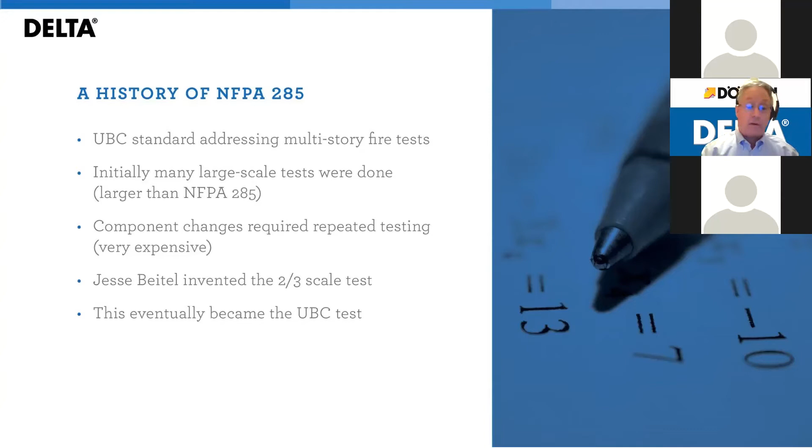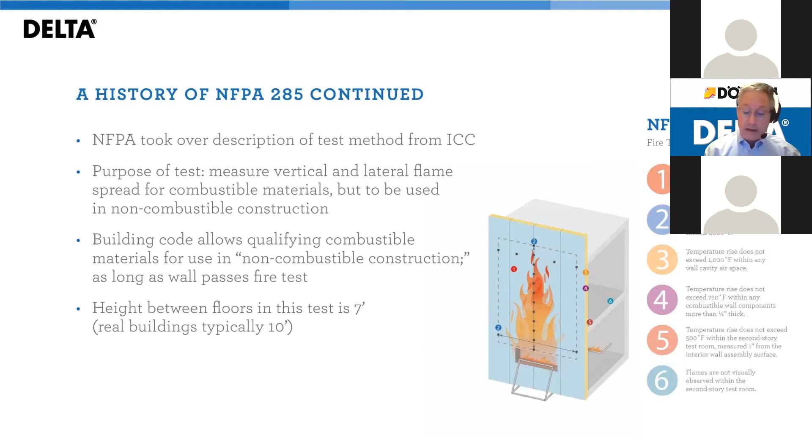To help address this complexity and expense, Jesse Beitel invented the 2/3 scale test. This eventually became the Uniform Building Code test, which, when the ICC came into play, was passed over to the National Fire Protection Association, the NFPA, to manage. The purpose of this test is to measure vertical and lateral flame spread for combustible materials to be used in non-combustible assemblies. So the building code allows you to use combustible materials in non-combustible or labeled non-combustible assemblies, so long as you pass this fire test. In the 2/3 test, the height between floors is 7 feet, whereas in a real building it's typically 10 feet. Hence, with some fast math, you can see that is, in fact, the 2/3 scale test.

So why does NFPA 285 exist? Quite simply, people use combustible materials in large-scale buildings, and they can catch fire and lead to some very tragic results. The 2/3 scale test was developed to help prevent uncontrolled flame spread in tall buildings, ultimately to reduce potential damage for people and property, to allow occupants time to get out of the building, and basically provide a much safer building.

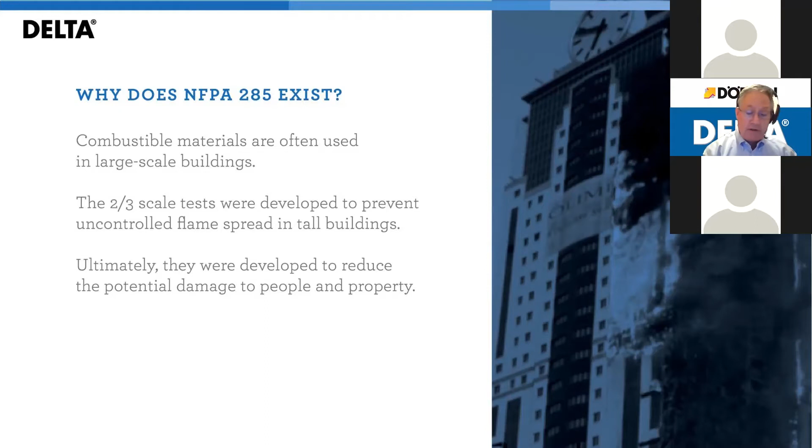But this is one of the major sources of confusion. What triggers the requirement for your building to be NFPA 285 compliant? In and of itself, building height is not a trigger.

It is actually considered a sub-trigger when considering WRBs in claddings. So the commonly held 40-foot rule really applied to whether or not you were using weather-resistive barriers. You can find other rules that apply to HPLs, high-pressure laminates, or ACMs, aluminum composite materials - 40-foot rules, 50-foot rules, and 75-foot rules. We're not dealing with those today. We're going to deal with it strictly with respect to weather-resistive barriers.

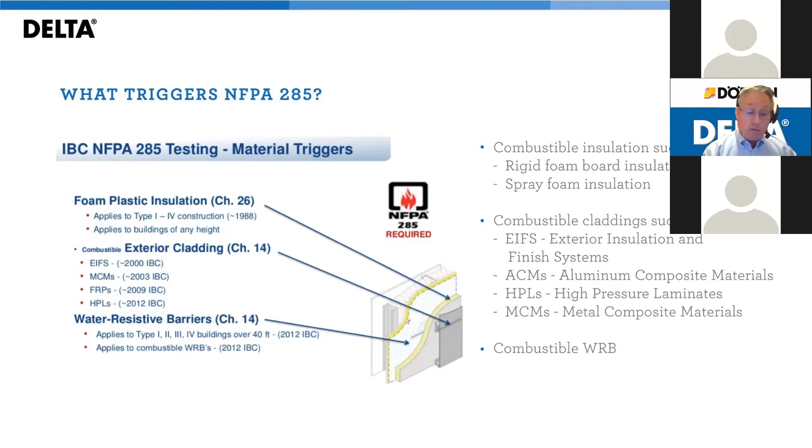One thing often overlooked is the fact that the instant you use a plastic foam in the wall for building type 1 to 4, at any height, NFPA compliance is triggered. Certainly in my personal experience, that's one of the most overlooked requirements.

So let's actually look at the pass-fail first. We will deal with the actual building code in a moment. These are the actual pass-fail criteria for NFPA 285. As a general statement, so long as the flames don't go higher than 10 feet, or not more than 5 feet to the left or right, you can pass.

There's also thermocouples in the system that will measure temperature at specific locations. A typical test may have 60 or 80 thermocouples. For example, number 11 would be outside the wall, 10 feet above the window. Number 28 may be 10 feet above the window inside the wall in the air gap. But as long as those thermocouples don't measure temperatures greater than 1,000 degrees Fahrenheit, you'll likely pass the test. However, always wait for the official lab report to ensure every thermocouple passed the test.

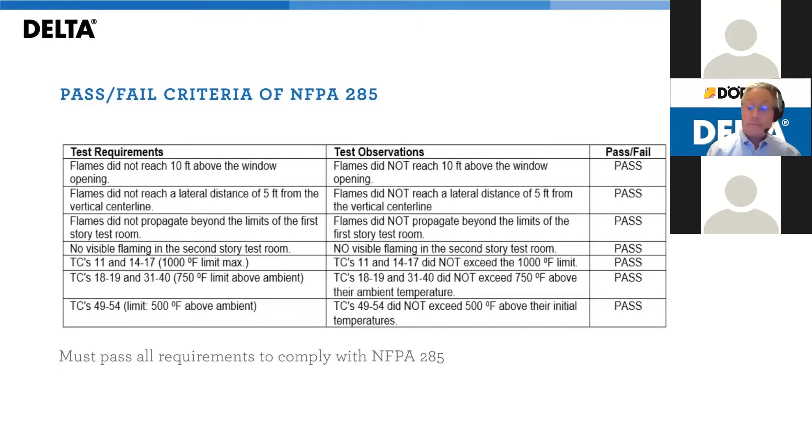So here's the basics of the building code. There was no requirement for NFPA 285 testing with respect to the inclusion of weather-resistive barriers in the system in the 2009 code. 2012 was the first attempt to limit WRBs and require NFPA 285 testing in buildings over 40 feet. Hence the commonly held understanding that 40 feet is the trigger for any NFPA 285 compliance - but it's only a sub-trigger with respect to the use of water-resistive barriers.

Most of us in the industry felt that that was a little restrictive. There's a wide variety of flammabilities in weather-resistive barriers - we'll touch on that again a little later. But in essence, that was fixed in the 2015 code.

So let's have a look at the actual code itself. Here's the section from the 2012 code - if you're keeping score, it's 1403.5 of the International Building Code. This is the part that basically said, in types 1 to 4 that are higher than 40 feet above grade plane and contain a combustible water resistive barrier, shall be tested in accordance with and comply with the acceptance criteria of NFPA 285. Well, since all water resistive barriers are flammable to one degree or another, that suddenly meant that you had to test all wall systems. And that's why the industry claimed that it was too restrictive.

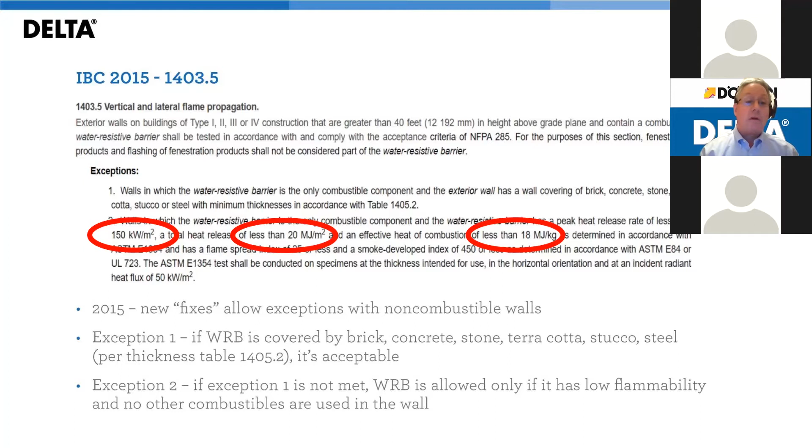This was changed in 2015, where in essence it said: if the WRB is covered by brick, concrete, stone, terracotta, stucco, or steel per some specific thicknesses, it's acceptable. But also, if exception 1 is not met, the WRB is allowed only if it has low flammability and no other combustible components are used in the wall. In those red circles, you can see some of the very specific measurements for the water resistive barrier. It must have a peak heat release of less than 150 kilowatts per meter squared, total heat release of less than 20 megajoules per meter squared, and an effective heat of combustion less than 18 megajoules per kilogram, in accordance with ASTM E1354.

2018 has exactly the same language. There was no change in the 2018 language, and there's also no change to the 2021 IBC language.

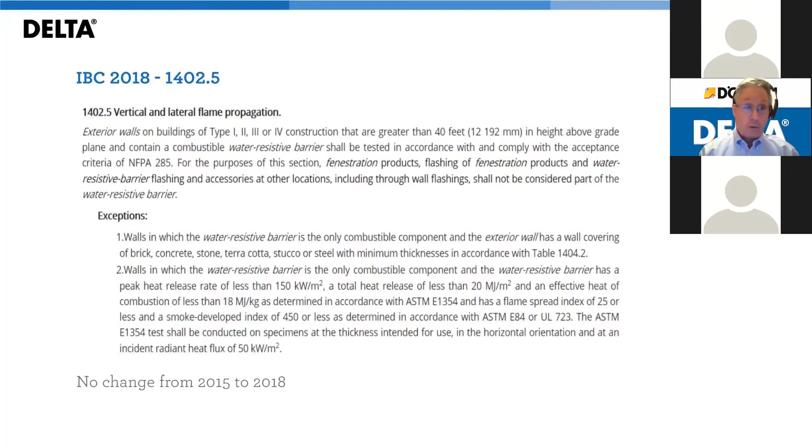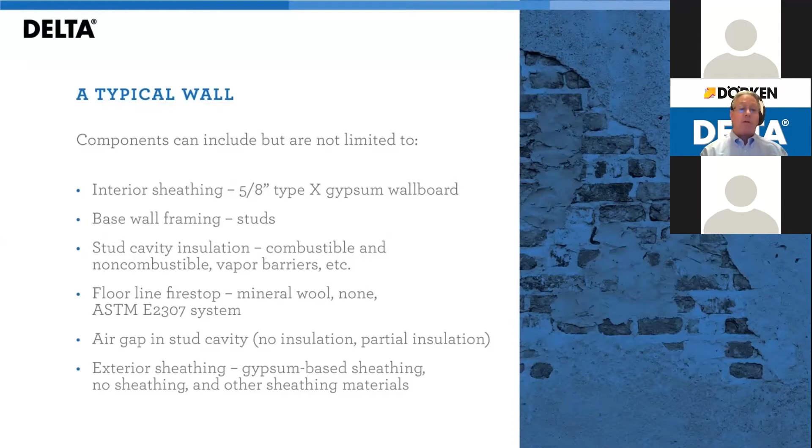So let's look at the way a typical wall is assembled. The basics of the test wall involve a lot of components. I'm not going to read through every single one of these because I have 2 pages of them. Here's a typical wall's components - as it says, it can include but are not limited to.

What I want you to get out of this isn't so much exactly what each of these components are - we will touch on them a little more later on. What I want you to get out of this right now is the idea that there are many, many possible combinations in the wall. You can do some fast math and probably figure there's over 10,000 possible combinations, and any one of these components are available in multiple brands. There's many layers in the wall. The reality of this is that it's impossible to cover every possible type of wall design in a single fire test. One can figure at the very least, there are 2 to 4 fire tests required to qualify as many options as possible. But there are manufacturers out there that have done as many as 18 or more fire tests to qualify as many options as possible.

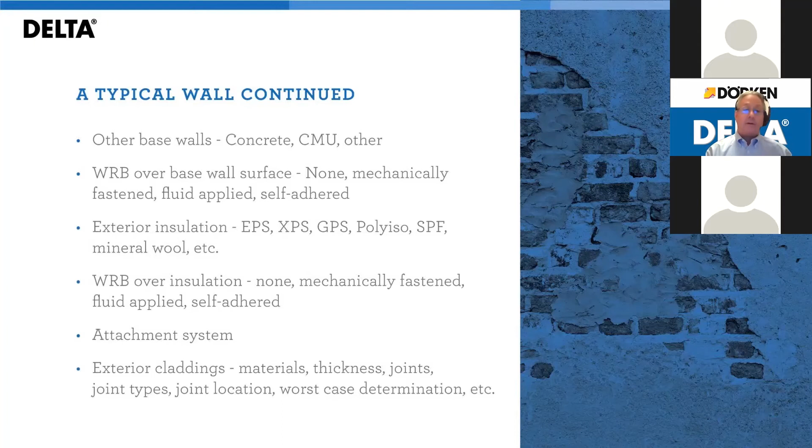So let's try to break the wall down into a couple regions. This will help us look at the components a little more simply.

Let's look first at region 1, which would be the base region of the wall. Different parts of the base region of the wall and how you analyze them for testing are very important.

Typically the base wall would be built with gypsum board on the inside, steel studs, and gypsum board on the outside. There's usually a fire stop at the floor line, usually an air gap if the insulation doesn't fill the entire stud—that's the space between the steel studs. And there are a whole bunch of different options for insulation: fiberglass, mineral wool, spray foam. Again, you can already see how the possibilities are multiplying.

Generally, to keep things simple, you want to use 5/8 gypsum on the interior. That's usually what's needed to run a fire test. Half-inch type C gypsum will probably generally crack and allow fire in and lead to failure.

A steel stud wall is often done because then through engineering evaluations, it's possible to allow CMU or concrete base walls, because steel stud would be considered a worst case scenario. We'll touch a little more on worst case scenarios as we move along. So that's the base wall, region 1.

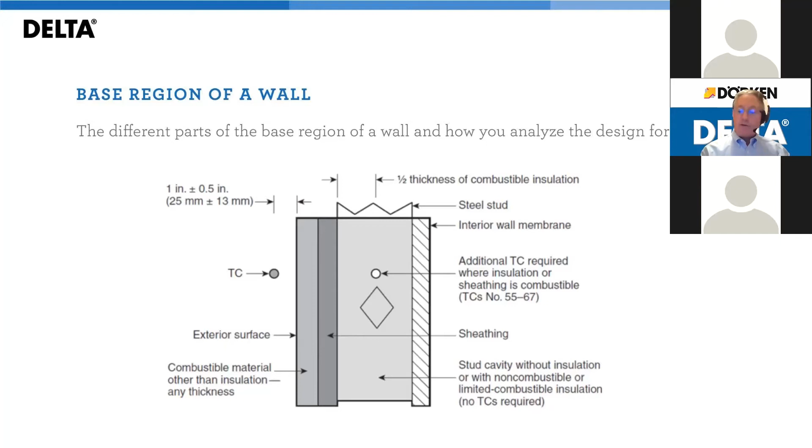The complexities multiply as we look at the exterior of the wall. Let's call this region 2, with many of the exterior components. So now you can see how the permutations are starting to add up. We've added other components to the base wall that ended at the gypsum sheathing.

It is possible, by the way, to design with no exterior gypsum sheathing, using foam directly over steel studs. Weather barrier outboard of the sheathing, often continuous insulation, and other weather barriers possibly outside that, an air gap and cladding, are the primary components of region 2.

Now, again, if you look at the numerous brands in these combinations, you will end up with a huge amount of possibilities for combinations and the possibility to test.

Luckily for many of us in the weather-resistive barrier business, many of the insulation manufacturers have tested a large amount of walls with WRBs either behind the foam or the insulation, or in front of the insulation. And as we touched on earlier, engineering evaluations can allow either the tested one or less flammable ones without having to do a full-scale test.

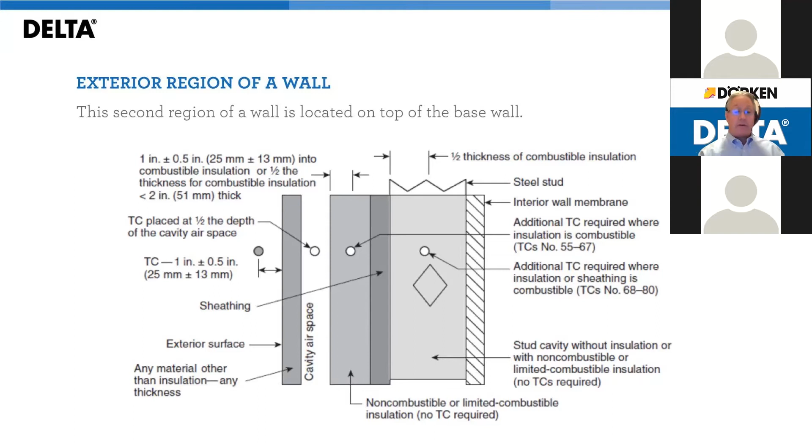Here's some examples of typical base walls. You can include concrete masonry units or a stud wall with interior 5/8 type X gypsum wall board, galvanized steel studs spaced at 24 inches on center with lateral bracing installed every 4 foot vertically or as required.

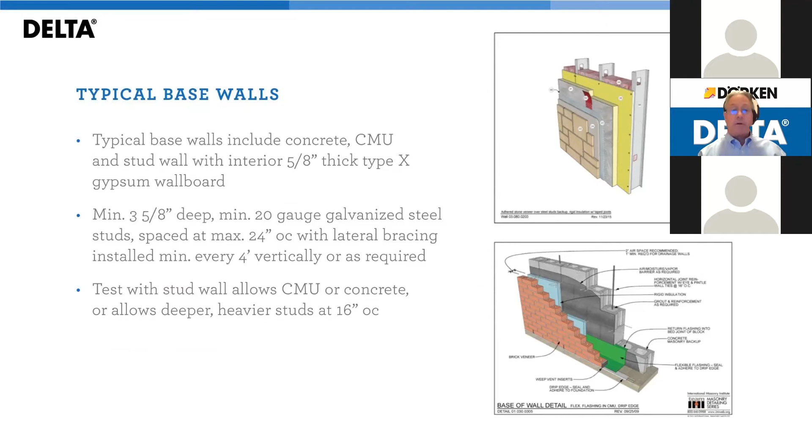Let's look at some typical cavity insulations. Really, we're just showing here different kinds of insulations that can be used. You can see fiberglass, mineral wool, paper or foil faced fiberglass or mineral wool, bearing in mind that glue is used in the facer and glue can add to the flammability.

Or insulation binders could also burn. Mineral wool with no binders does not burn. So you can see some non-combustible insulations there. Combustible insulations would include, let's say, spray foam or cellulose insulation—though I personally have never seen an NFPA 285 compliant system that contains cellulose insulation.

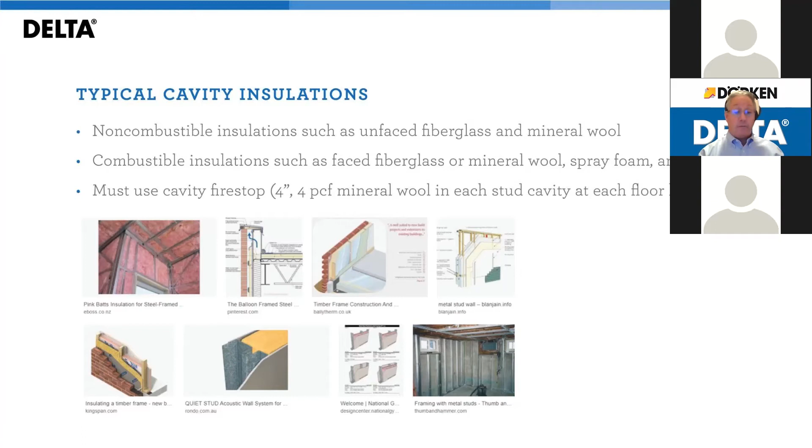Typical exterior sheathing would be a minimum 1/2 inch unrated or 5/8 fire resistant rated exterior type gypsum sheathing. As I said earlier, you can have none, but this will allow the insulation to be exposed to fire on both sides.

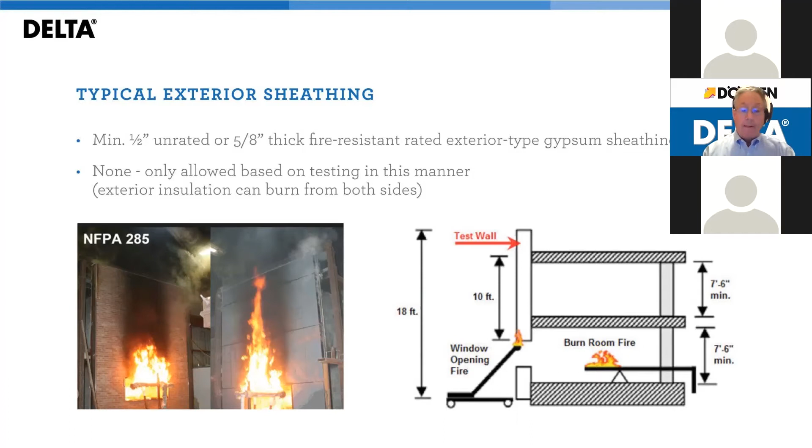There are a lot of different weather resistive barriers on the market. There are fluid applied, obviously. There are mechanically attached, there are self-adhering. All of these will burn differently. All of these will contribute to the fire differently.

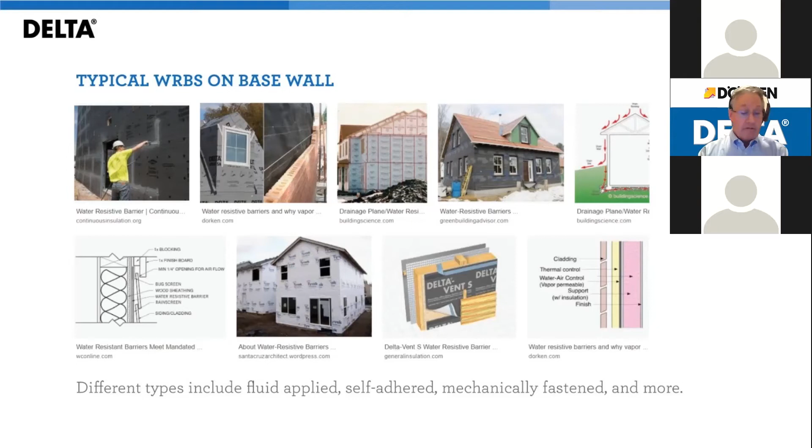So if you have no insulation with the WRB applied directly over the sheathing, then that can be flammable. You will find that there are only maximums right now applied to the insulation market.

There is a proposal that's in the draft form to add minimums as well, because as I said, if there's no insulation, the WRB can burn more, and the insulation can act as a protective layer.

It's important to realize too, with insulation manufacturers, that they all have different chemistries. So just as an example, if you test with one polyisocyanurate brand, that does not mean that all polyisocyanurate brands are approved in that assembly. That test is very specific to that polyiso that you have tested with.

Again, that's because many of them, or they all, have different chemistries. They will all burn differently. There is a new standard being worked on that will require a minimum foam thickness, as well as there's already a requirement for maximum foam thickness.

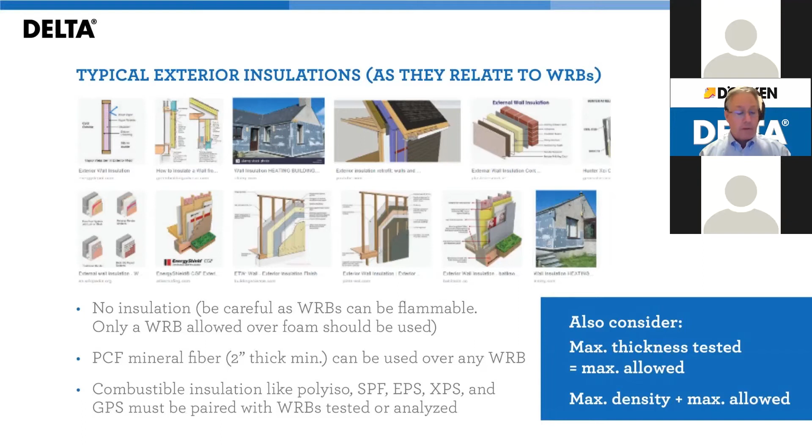But that draft is probably years away from becoming effective. Let's have a quick look at the air gap.

The air gap is an important part of any rain screen assembly. This is the part that provides the ventilation for drying and the space for drainage. However, when doing a fire test, that same air gap can also provide more oxygen for the material to burn. So typically, they will say a maximum air gap.

The new standard that I mentioned will allow the air gap to be plus or minus a half inch, giving everyone a little more flexibility. But nonetheless, the air gap is also an important listing you'll see in any NFPA document. It's important not to exceed that, because it will change the burning characteristics of the wall.

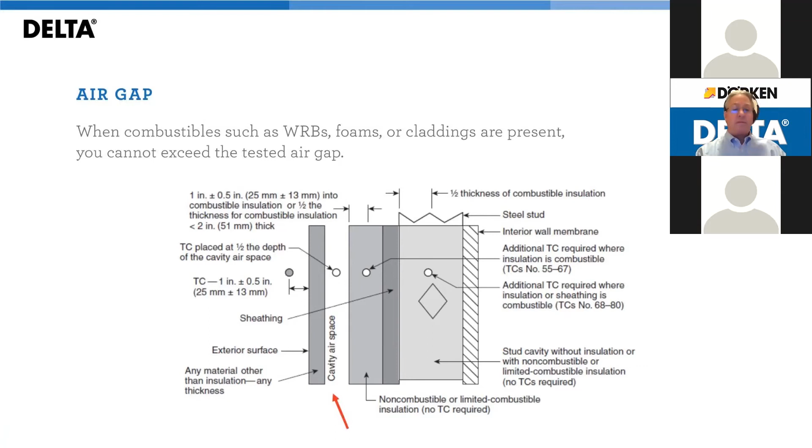Claddings. There are many claddings out there, not all of which at the moment are covered by NFPA 285. So if you test with brick, for example, that can get you the ability to use other heavy masonry claddings.

If you test with ACM, you can probably get sheet metal or fiber cement allowed as well. You can also allow masonry claddings if you test with ACM. If you test with brick, the report will say you can use other masonry systems with closed joints.

If you test with ACM with a semi-open joint, you will probably be allowed open joint materials for other materials like sheet metal or fiber cement. So if you want to use brick with open joint, for example, and you passed ACM, you will be allowed.

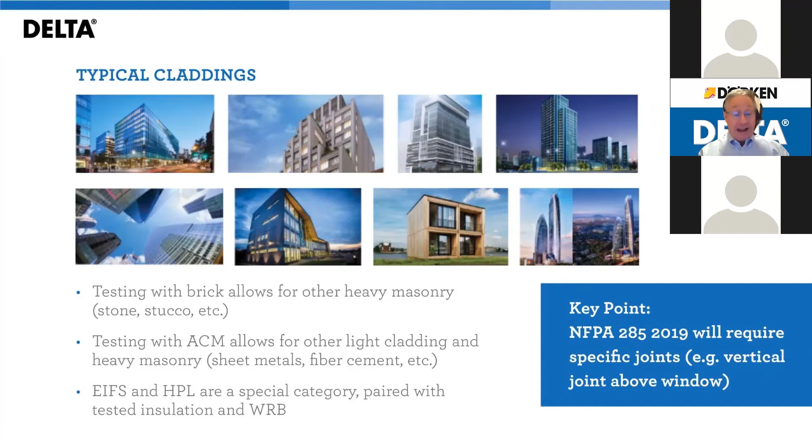So all of this means that you need to look at what you've passed and use the joint system with the cladding that you've had tested.

So let's look at window perimeters. This again is an often overlooked detail. If you select a particular insulation and wall system, you need to ensure that you follow the specific details for that wall system in the fire stops.

A great example is the third one on your screen, the XPS window head. It's important to note that the fire stop above the window, that orangish gray piece, is mineral wool, designed to help keep the flame from reaching the plastic foam.

Often when you see plastic foam designed into a system that is trying to be NFPA 285 compliant, these are the details that are overlooked.

But typically, the polyiso industry runs their test with aluminum flashing around the window, which quickly melts during the test, which means so long as everything else passes, they have few other restrictions around the window.

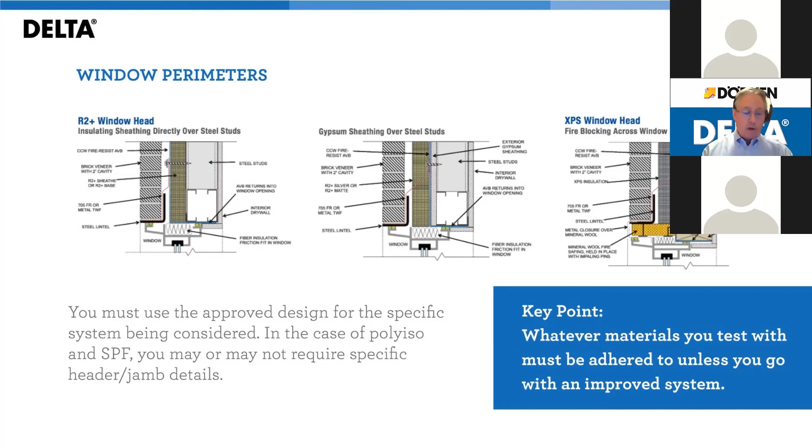So here's a slightly better look at that number 3 detail that I was talking about. The important point here is, in order to ensure that the designed wall assembly is compliant, as a design professional, you should request the full report to ensure your design contains these details. Without these details that were done on the tested wall, your building will not be compliant.

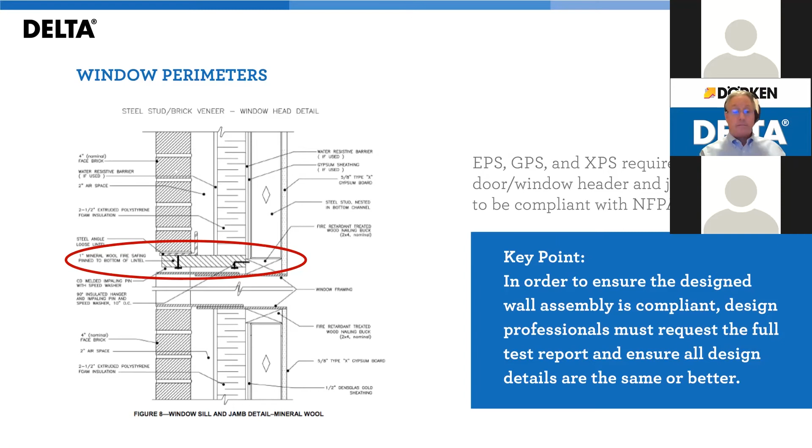So let's have a quick look at how WRBs are analyzed for engineering evaluations. You've heard me mention worst case testing several times. You've probably been waiting for me to explain it, so I shall.

So the principle of worst case testing is really looking at the thousands of possible assemblies, realizing that testing is very expensive, in excess of $25,000 US, realizing that the average test lab can do maybe 1 or 2 of these a week, and then deciding what you should test.

Your fire engineer will generally recommend testing the worst case possible. What does that mean? That means you want to test the most flammable assembly you can that you think will pass - something that will just get you over the line, because that means everything less severe can be made acceptable through engineering judgments.

So, for example, if you run a test with a highly flammable weather barrier underneath the insulation and a moderately flammable weather barrier in front of the continuous insulation and behind an ACM and pass the test, that means if you replace any of the weather resistive barriers with less combustible ones than the original, then it becomes an improved design, a less flammable design, and a compliant design.

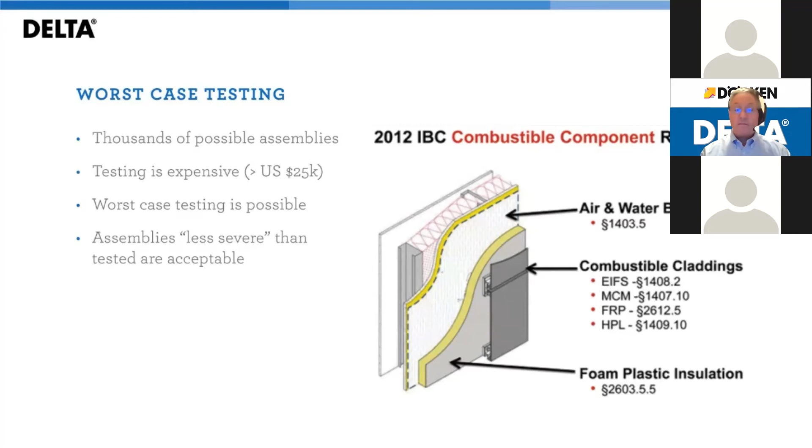Important to realize that as you do the layer by layer analysis of your system, changing the components will affect the results. Adding a component will affect the results. Removing a component will affect the results. A fire engineer will not write an engineering judgment unless he has analyzed the entire assembly.

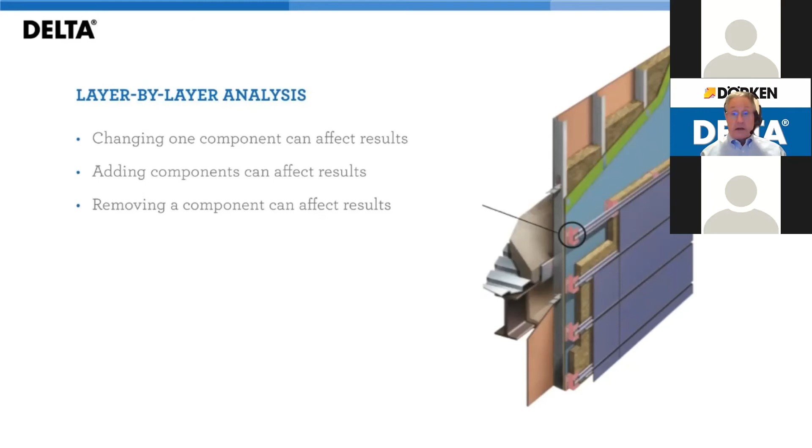What weather-resistive barrier is being used? What is its location? Then through references or data provided by clients, he can prove whether or not the proposed design meets the requirement. In some cases, more testing must be performed to prove that the weather barrier is less combustible than the one in the approval. Once that is done, you can get a compliant system.

So how do we analyze these weather-resistive barriers? As I said earlier, the tested WRB is used as the baseline. So whatever you used in the primary big burn or big wall assembly, that's used as the baseline. Water-resistive barriers that are less flammable than the tested WRB can be allowed to replace it.

So how do you determine what is less flammable? That is what I alluded to earlier when I was talking about the code changes. ASTM E1354, commonly known as the cone calorimeter test. You analyze that and compare the data to the baseline, and if it's less flammable, then you can use it. What are the parameters? Those are very similar to the ones we saw in the code earlier: time to ignition, peak heat release rate, total heat release, and heat of combustion.

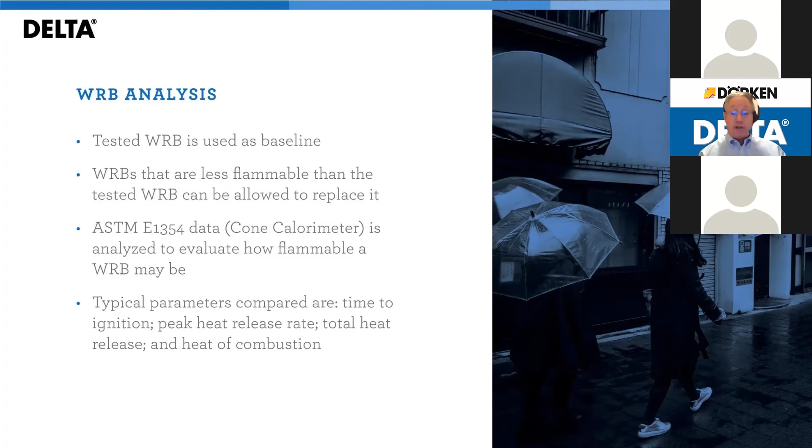So there might be certain exceptions, but that must be analyzed very carefully by a fire consultant. But the bottom line is all four of those items should have better numbers than the base material to which you are comparing in order for it to be approved.

An important part of this presentation, and if you leave with nothing else, you should remember: always follow NFPA 285 tables and the required details. I truly mean that if you get nothing else out of what I've said today, that's the most important component. These tables lay out exactly what you may use in each specific layer and in combination with what other components from other layers.

Each table is unique. The components of this are derived from the big burn testings that we talked about, doing the full NFPA 285 tests. You can only use the components listed in the table. You can't go from one manufacturer's table to another and say, hey, it's okay here, it must be okay in that one. Because if you change or alter a component and the system has not been tested and this table does not allow it, you no longer have a compliant wall system.

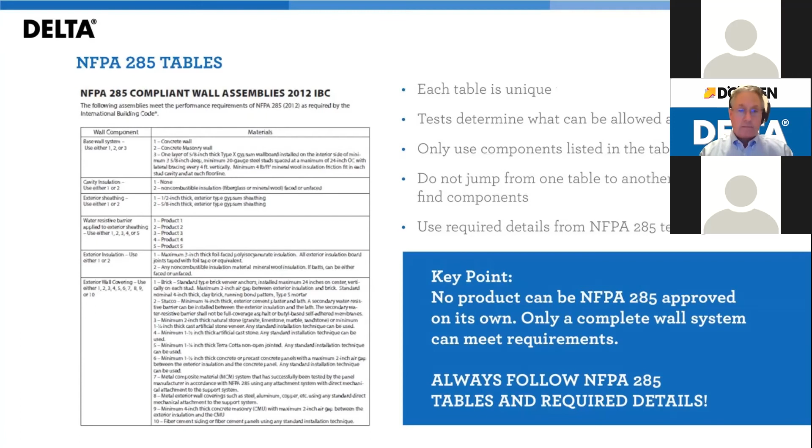So I'm going to dwell on this again. It's important to realize that there is no such thing as an NFPA 285 product. There are NFPA compliant systems of which a product may be part, but the product itself is not NFPA 285 approved.

You cannot combine components from one table to another without proper experience and test data to support the claim. So simply because you find it mentioned somewhere in the table doesn't mean that you can use it however you want, or that a given component is mentioned in another compliant system doesn't mean that you can drag it over and drop it into yours. So spec sheets are often misunderstood.

This is misused, but I prefer misunderstood. And that misunderstanding can be dangerous.

Contractors sometimes replace components when availability is delayed, particularly now when we have some very dramatic supply chain issues. But again, in order to be NFPA 285 compliant, you can't simply drop it in without checking with a fire engineer. You should always follow the NFPA 285 tables. If your supplier doesn't have one of these tables, I would not recommend that you use the product if you need to be NFPA 285 compliant.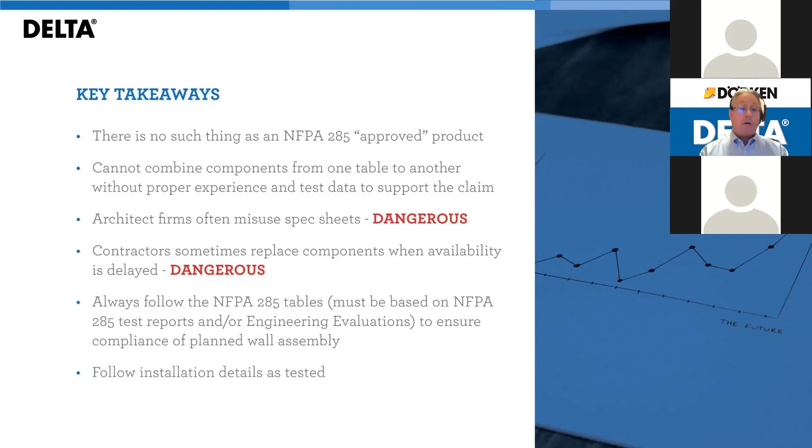So now that you've designed the compliance system, it's important that all of the installation details are followed, both when you're drawing the details as well as when the building is being constructed, because those details are critical to the performance of the wall should there be a fire.

You've heard me mention engineering evaluations a whole bunch of times. An engineering evaluation, an EEV, or an engineering judgment, commonly referred to shorthand as an EJ, for many of these past years have been used and accepted, but they have not technically been allowed. There is now, in the 2019 change to the NFPA 285, they are officially accepted.

The new guide offers a way to do a layer by layer analysis, and it will allow any water resistive barrier only if it is behind 2 inches minimum of 4 pounds per cubic foot minimum, unfaced mineral wool that meets ASTM E136, non-combustible, and if the remainder of the wall complies with NFPA 285. In other words, if you put stuff around your WRB that doesn't burn, it's acceptable.

But again, EJs or engineering evaluations need to be done by qualified fire engineers. This will allow you to use a wall, be NFPA 285 compliant, even though the full NFPA 285 burn test has not been done. An engineering judgment to date typically can run, depending on the details, maybe around 5,000 US, give or take.